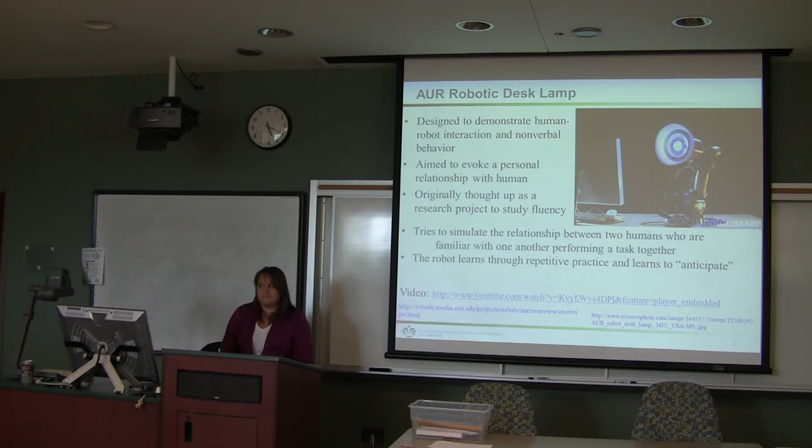My name is Josh Morgan, and I did the AUR robotic desk lamp. What this lamp was designed for was to demonstrate human-robot interaction with nonverbal behavior, such as movements with your hands, any kind of bodily movement to basically trigger the light to move where you want it to move.

And it's aimed to evoke a personal relationship with the human by taking repeated actions and basically remembering what those mean, and then when it sees it again, it's going to re-implement that same movement so that the human using the lamp is able to build a connection with the robot itself and feel like the robot understands the human and not just its motions.

And it was originally thought up as a research project to study fluency in your behavior and how the humans are able to interact with the robots.

And it tries to simulate the relationship between two humans as if they had worked together for a really long time and they've been doing the same skills for a long time, by just taking the memorization of the movements that are repeated each and every time this action occurs and being able to replicate them over and over based on the human's movements and how it commands the actual lamp to move.

So it was almost simultaneous. Whenever the human arrived, the lamp would arrive at that same color he was telling it to change to. This shows that the lamp basically understands the human's movements and is able to realize what the human wants it to do without any verbal command, based on previous verbal commands telling it what to do and linking a movement behavior with an actual behavior.

And that's basically it. So it's able to follow, and whenever he gets up and leaves, it knows to turn itself off.

I thought this was pretty cool because it's not just desk lamps, it could also work with, it was actually modeled after a 5-degree freedom robotic arm that was able to do the same thing. It simulated a human's movement and followed their hand and arm movements, and that's where they got the idea to use it in a desk lamp type of project.

Are there any questions? Can it differentiate between humans?

As far as the other testing, I'm not sure if it can, because in one of the videos, I think that was a concept video, but in one of the actual trial research videos, he had this device on his hand, and I believe that's how the lamp knew where to go in relationship to the person.

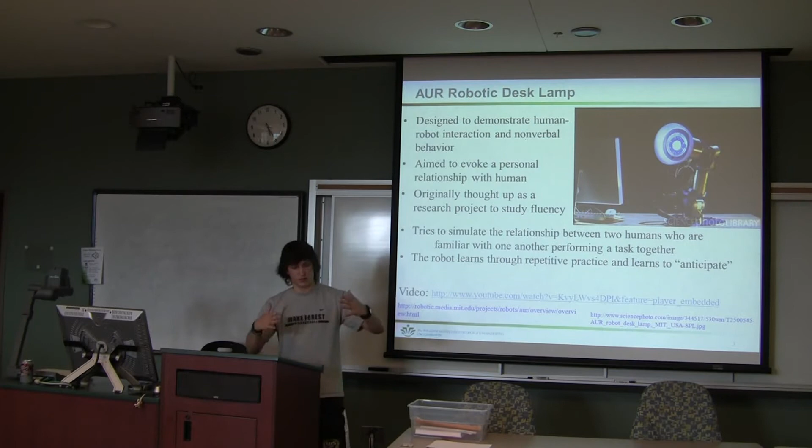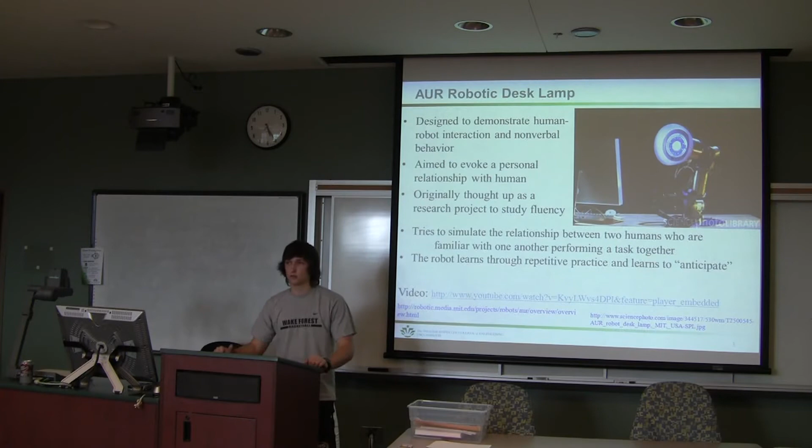It was actually set up like a triangle, so whenever he would walk from station 1 to station 3, skipping station 2, the lamp would go around starting at blue, switch to red as soon as it hit station 2, and by the time it got to station 3, it would have already switched back to green. So it's pretty cool, but I don't think it can differentiate between humans.

Are there any other questions?

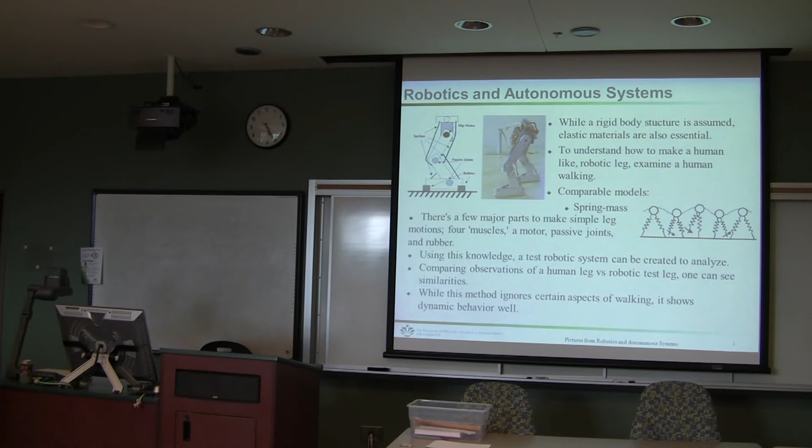Hello, I'm Alex Monster. I'm going to talk to you about the robotic autonomous system that is the robotic leg and how it works, basically.

Now, while the human leg is a rather rigid structure, there are some elastic materials required for the movements of the body, such as leg movements. You have to lift the leg up first, and it has two muscles that allow you to move up and down and swing it, basically.

There are some models it's been compared to, such as the spring mass model, which can be seen on the right side. There are four major parts to a simple leg: the motor, some four muscles which can often be used as simply springs, some passive joints, and some rubber to help it hold still when it stops, rather than just sliding around on the ground.

Now, this knowledge can be taken to make a test robot system, such as the one in the top left here, that can analyze and compare to a human's movement that can be analyzed. Then, using those two observations, you can compare how a human leg moves as compared to a robotic leg built to work like it.

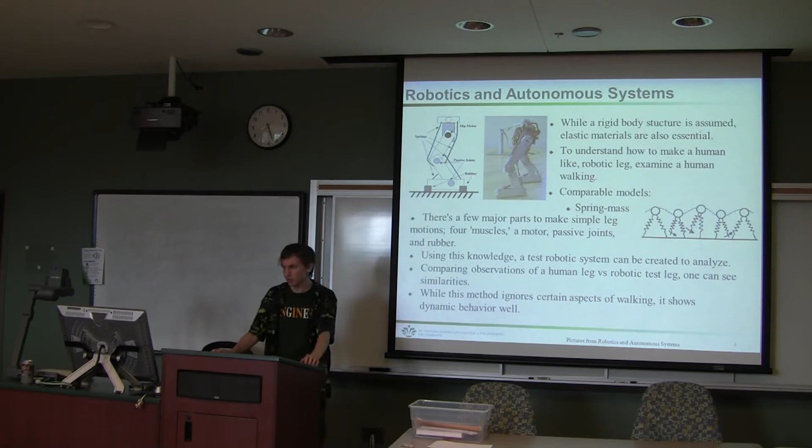While the method ignores some aspects of walking, such as turning while taking a step or such, you can basically get an idea of the dynamic behavior of the movements. That's all. Any questions?

My name is Barry Myers. I'm going to discuss the advancements in telesurgery.

Telesurgery is a technique that allows surgeons to operate on a patient while being at a considerable distance away from the operating table. The first successful operation was done in France on a lady in 2001. The surgeon was based in New York City, thousands of miles away, operating on a very small area. Pretty amazing stuff.

So how does it work? Multiple robotic arms with very accurate and precise sensors are used to interact with the patient. Many cameras at different angles are used just to give the surgeon a good view of what he's doing in there. We'll discuss this a bit later.

All the information is sent through the internet to the surgeon, who views it on a monitor and has a joystick that can maneuver the cameras around the area he's working in. The robotic arms have great precision and can be moved within very slight distances. Today, the most commonly used robots for telesurgery are the Zeus and Da Vinci.

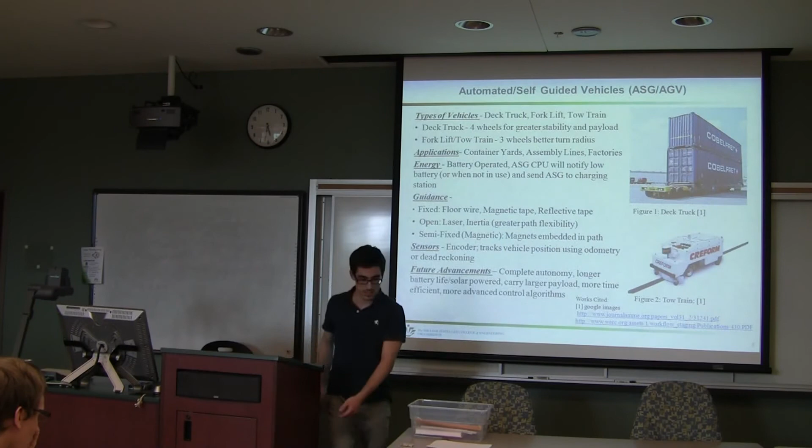I'm going to be presenting automated self-guided vehicles. You may have seen these before or seen the television program including them.

There are 3 types of automated self-guided vehicles: the deck truck, the common forklift, and what's called a tow train. The deck truck carries heavy payloads. It's designed with 4 wheels or greater, which improves its stability and the amount of payload it can carry.

The forklift and the tow train generally have 3 wheels or more. The forklift, with a single wheel on the back for 3 wheels, allows the forklift to have a better turn radius. Some applications are container yards, assembly lines, and factories.

The energy is battery operated. The CPU will notify when the battery is low and when the automated self-guided vehicle needs to go charge.

It'll follow a path back that's already coded into the program it's being sent to. It's pre-programmed to follow a path in, like, the container yard or a factory.

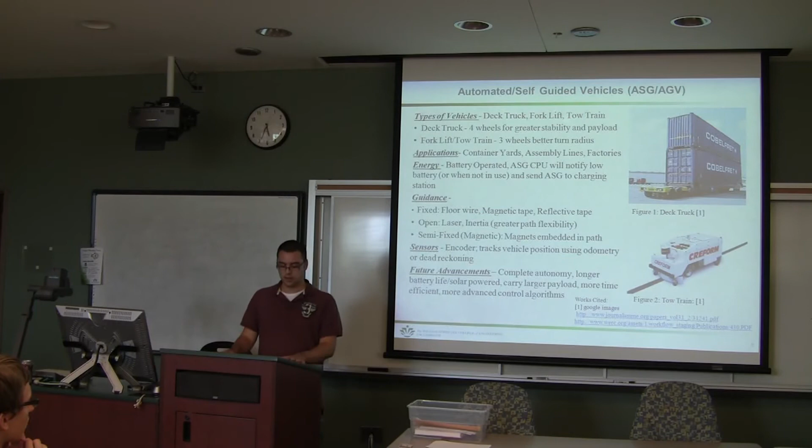Some sensors. The only one I could really find was the encoder. The encoder tracks the vehicle position and velocity using odometry or dead reckoning.

Some future advancements currently under study include complete autonomy, longer battery life, such as a better battery or solar powered. The deck truck can carry a larger payload, with more efficiency and more advanced control algorithms.

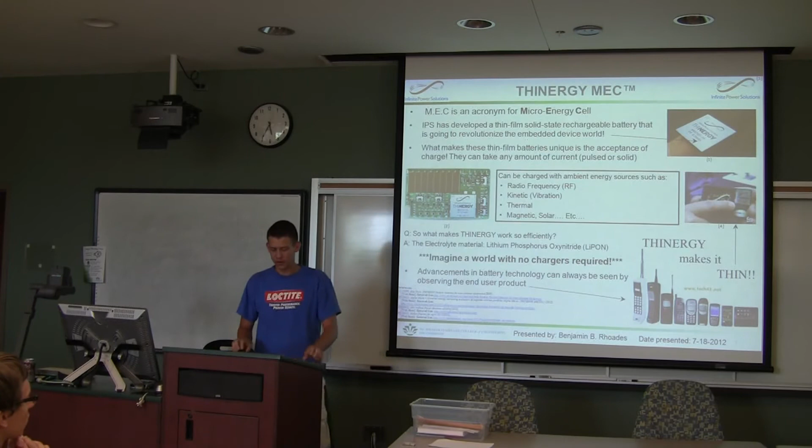Good afternoon, my name is Benjamin Rhoades. I'm going to be presenting on the Thinergy MECs.

This is actually a pretty exciting new technology that's come out. It first came out in 2007 for research, but really hasn't been proven until this past year. Of course, with any new technology, you have to have a period of proving yourself, so the Thinergy company has actually done this. It's made by Infinite Power Solutions. MEC is actually an acronym, it's Micro Energy Cell. They've coined this phrase, hence the trademark in the presentation.

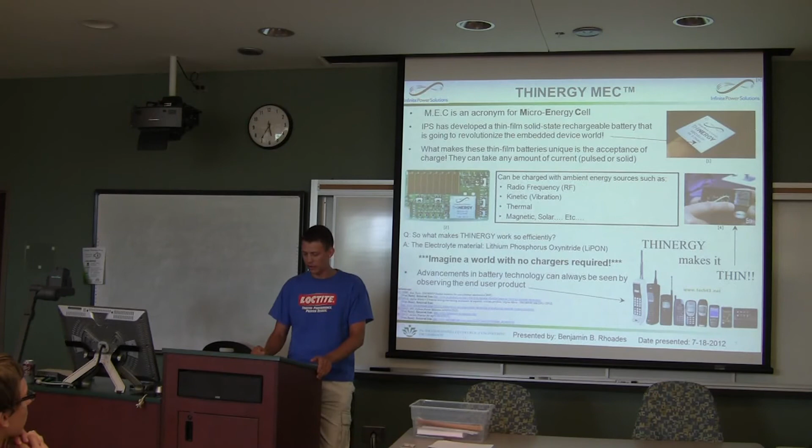So why do we need this for embedded systems? Think about this: most of the things that limit us are the batteries we have right now. We've used dry cell batteries for years and years, and most things are designed around dry cell batteries. We've had lithium-ion batteries in the past couple of years, but no long-term solution to the problem. This is a problem that Thinergy has addressed with their new MECs.

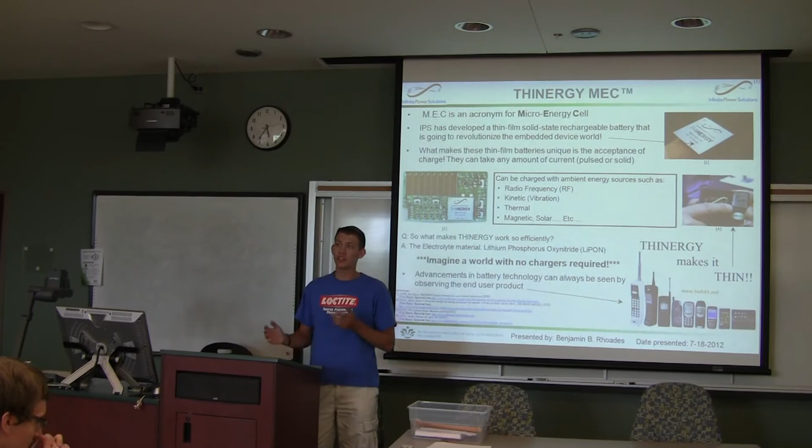This is a thin-film, solid-state rechargeable battery. What makes this different than most other rechargeable batteries is the type of charge it can accept. It can be done with constant current, like how most batteries are charged, such as lithium-ion. But the Thinergy can be charged with any kind of current it takes, from microamp to nanoamp. It can be pulsed, it can be solid. This is very important for energy harvesting.

So as you see here on the picture to your left is the alpha micro evaluation board. This has solar cells on it to be able to harvest this energy.

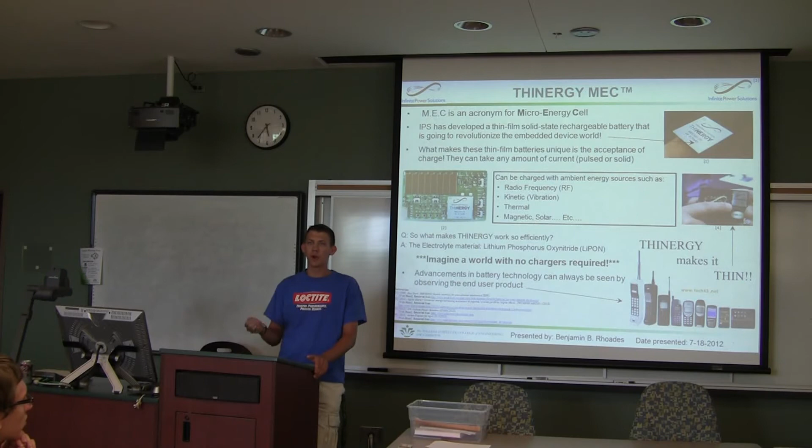So what does this mean for embedded systems in robotics, for example, for this class? You can actually embed this in your system for the life of the system. So if you have a robot that needs to operate autonomously and just report back information, or a data logging sensor in a bridge, for example, you can embed this in the concrete and never have to charge the battery again, because just the sheer vibration from cars going on the bridge will recharge the thin cell battery.

So what does this mean for future technology? As we can see from our picture, just in the past 30 years, as Dr. Conrad can attest to, as technology grows, things get smaller and get better. Hopefully none of you have the first cell phone ever invented, hopefully we're a bit more towards the right end of the spectrum. But that's one of the major things limiting us in our technology right now. The other components need to be invented as well, but battery technology is where the limiting factor is right now.

So I think this Thinergy micro energy cell is really the answer to some of our embedded problems for the future. It would be great to have a world with no chargers. That would be awesome, I know it would be for me. I hate charging my phone every day.

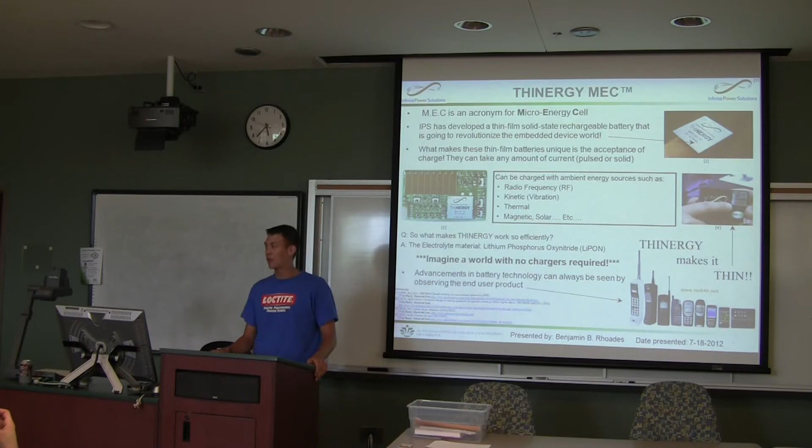Is there any questions? How does it charge based on the vibrations of a car driving across the bridge? It uses vibration from the actual car. What it does is take a kind of piezoelectric approach, that same kind of thought. What makes it unique is this LiPON material they use for the electrolyte, that's what enables it to accept the charge. That LiPON has only been out, from what I can see, for about 3 or 4 years.

So it's actually new technology. They have to have an energy harvesting device for that, which is kind of built in-house, so there's not much information about it. But they do have magnetic solar energy, so it's pretty awesome.

A lot of vibration harvesting is also due to a magnet and electrical field that is generated when the magnet moves. You can imagine it's not very much.

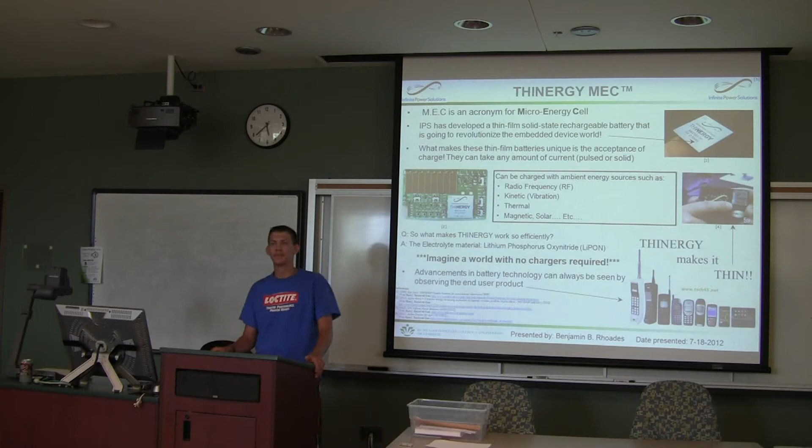Salazar, and I'm going to talk about neurosurgery for the future. Right now the robotic systems we have are used to assist surgeons and extend or enhance their abilities or skills.

For instance, the surgeon's average hand movement, like the tremble, is about 40 micrometers. By using robotic systems, they can drop that down to like 4 micrometers, so it doesn't shake that much.

Right now we have 3 systems that are being used currently. One is the supervisory control robotic system, which is when the surgeon programs the robot using some kind of virtual environment, and then the robot operates while the surgeon just supervises the movement.

If anything goes wrong or he needs to adjust something, he can stop the surgery and make adjustments. The other one is telesurgical, which uses joysticks and a monitor or some kind of scopes, and you can operate in real time in different places. The other one is a shared control robotic system, where the surgeon uses some kind of robotic hands, operating in real time but doing the operation with the assistance of the robot.

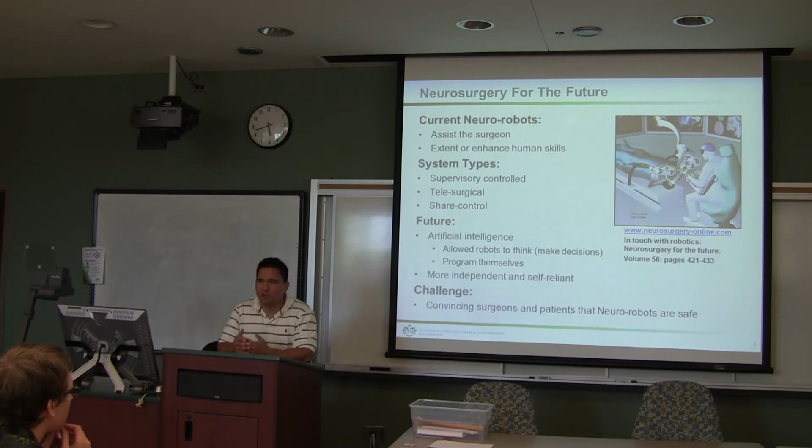If the tolerance is very, very small, how can the doctor stop the procedure in case something goes wrong? Well, I would assume it's just pressing some kind of control, he has control over a computer or something. The clock is very quick, so maybe you can't stop it in time. Right now it's like dual core, quad core, they're pretty fast, so yeah, I think... it would be able to stop it.

Any other questions? All right.

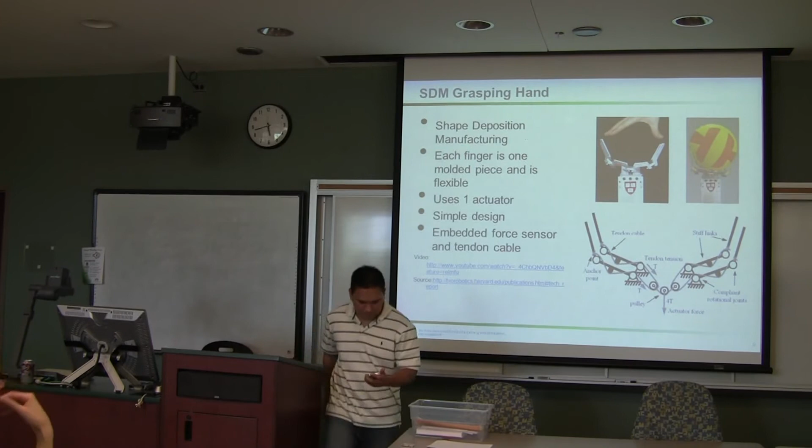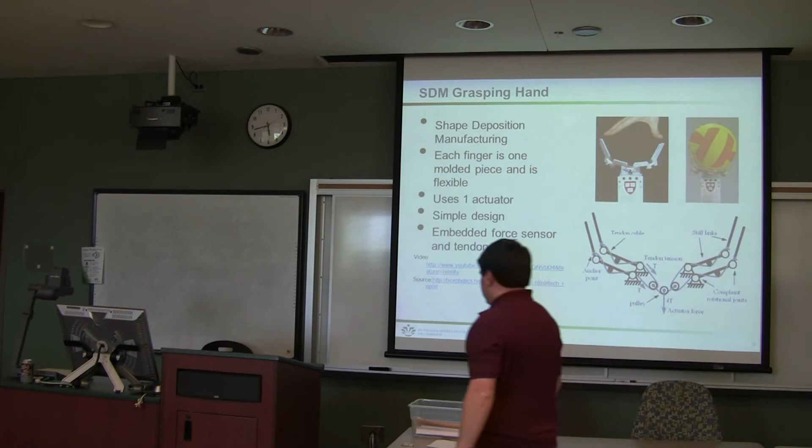This is the shape deposition manufacturing grasping hand. Shape deposition manufacturing is similar to 3D printing, where a layer of material is put down. Any components such as sensors or cableways that you would want to put inside of the gripper, you install those, then another layer of material goes down, and you have your finger.

With this type of manufacturing, each finger is a single piece and weighs considerably less than if it was machined from, say, aluminum or plastic or other types of materials. It also requires fewer parts.

This particular gripper uses only one actuator, which you can see at the bottom right here, and each finger has a stainless steel cable that runs past the first joint and up to the second joint. When tension is pulled, it causes the finger to close.

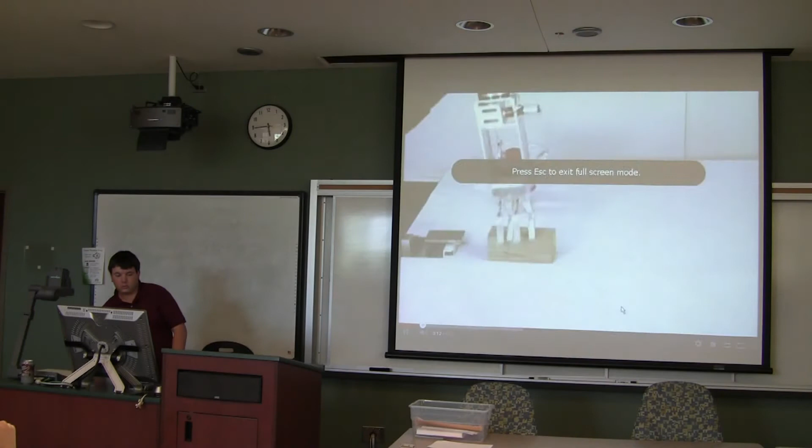With this design, position doesn't have to be very accurate. You just have to get close enough to the object, and the gripper is designed to expand open or go around the object. Whereas with other styles of grippers, the gripper is usually designed to conform around the object itself, so if you had different shapes, you would have to change grippers.

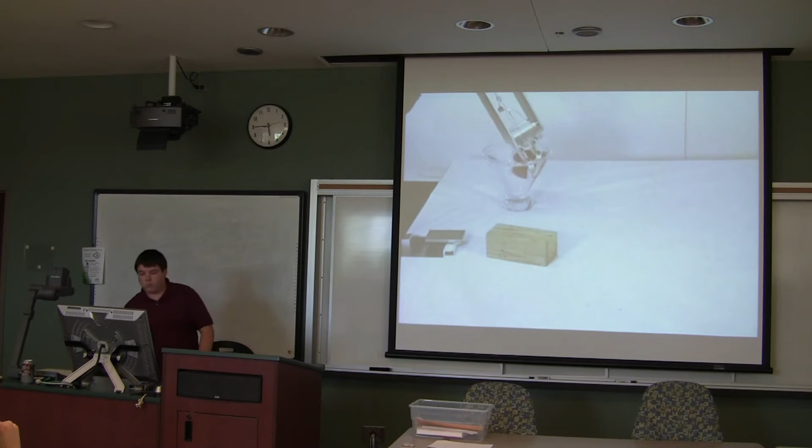Kind of like the claw that you play in. Yeah.

With this type of manufacturing, since you're not getting precisely over the object, the grippers are designed to flex possibly 2 inches in either direction.

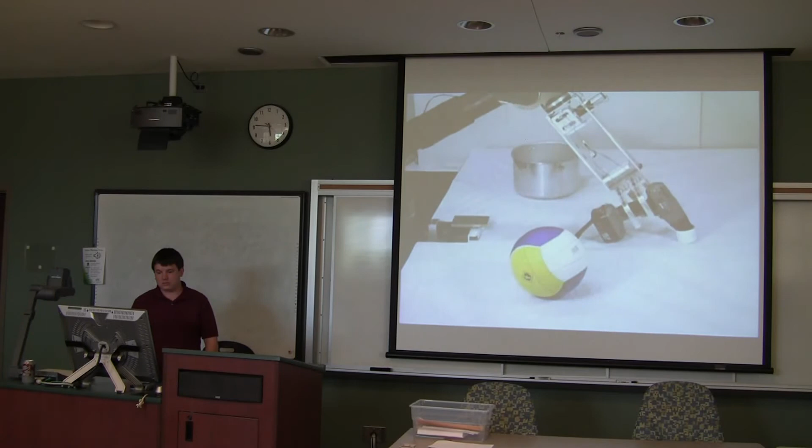Is there any questions? If there were multiple CDs right there, would it be able to grab just one? Even I had trouble doing that. It might not be able to grab more than one. To answer your question, no, it's not like the game, because in the game it doesn't actually grab anything.

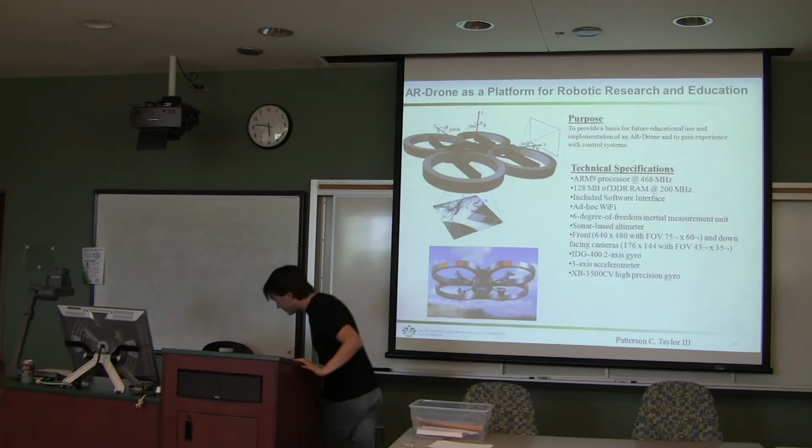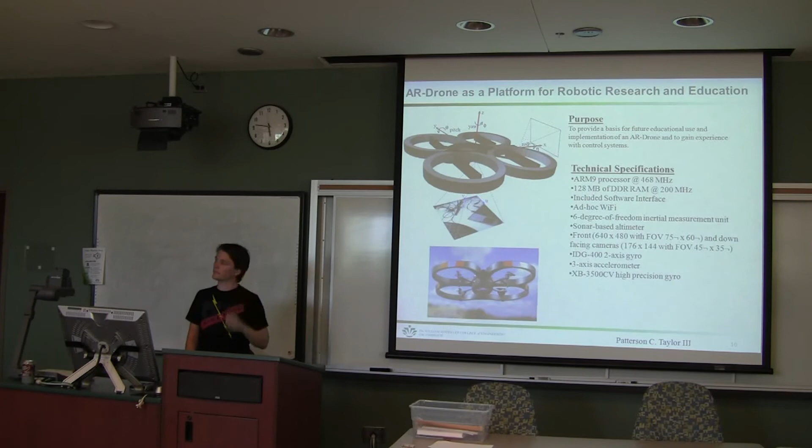Okay, so I'm Trip Taylor, and I'm doing an AR drone, or quadricopter, as a platform for robotic research and education. The purpose for this robot, and the reason the guys worked on it, was to provide a basis for future educational use, similar to what we do with the Danny Block, so that it can be used for educational purposes.

It operates with an onboard processor and 128 megabytes of RAM, and it has built-in Wi-Fi, so you can connect it to just about any computer or wireless device. It has a lot of different measurement units to figure out the roll, yaw, and pitch, all shown here.

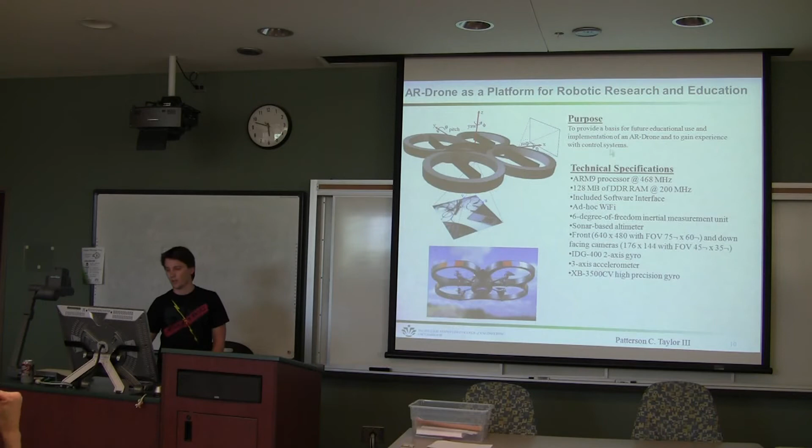It's got a front-facing camera that's higher quality than its downward-facing camera, which actually hurts it, because onboard it has to compress that file and send it, so you get a slightly delayed picture. But these guys figured out a little hack that isn't in the paper, a bit complex, to cut down the amount of data transferred so it would be faster.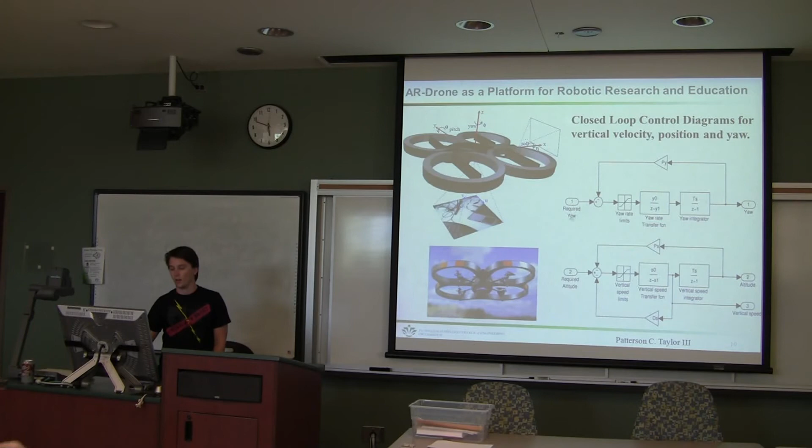You can see right here they have a moving bot, and they do it again later in this picture. The downward-facing camera uses their own image processing, which they did not share in the paper, to determine where the target was below it.

They could actually drive this little car around, and as long as they kept the altitude of the quadricopter above 0.4 meters, it would work, because below that the lower-facing camera would see a smaller image and wouldn't work as well. So as long as they kept it above 0.4 meters, they could drive the car around and it would manage to stay hovering above the vehicle.

This all goes towards learning the same things we're learning in this class, only more complicated. The future generations after their robotics are going to be something we probably couldn't even come up with today, and they'll be using platforms like this and the Danny-Bot to learn it.

And here's my credits for the guys who wrote the paper. Any questions? You cheated, that's more than one slide. Right, yeah, well the course was changed. Minus 10. It's actually a slide - it took me forever to figure out how to do that.

What was the open loop? How did they do the open loop? What did they do with the open loop control sequencing?

The open loop controls the pitch, roll, yaw rate, pitch and roll, and the vertical speed. That's why I threw this image up there so you guys can see which each piece was.

This bot already exists - you can go out and buy it, but these guys provide some directions for people who would like to use it in an educational setting without spending the initial 2 years that this team worked on it to work out the best way to operate it.

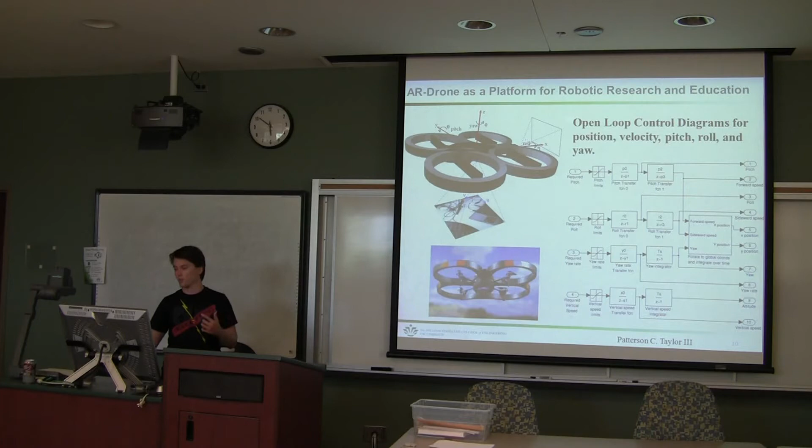The bot itself has a built-in system to work with the pitch, roll, and yaw, and keep the motor speed and angles at a set rate. That's why they were able to do these two closed loop setups to control it, and then they left onboard processing for maintaining those speeds.

How many cameras did you say that thing had? Two, a front-facing one and a downward-facing camera. This picture is taken with the camera underneath it. I believe that's nothing more than the Parrot quad rotor, which is out of the box controllable with an iPad or an iPhone.

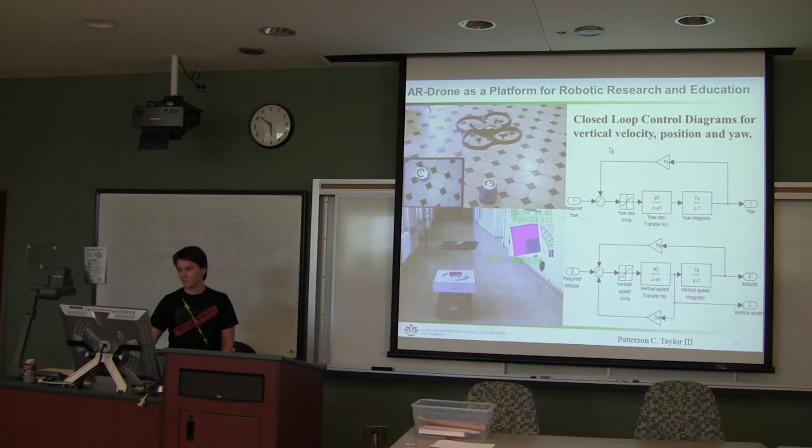Yeah, these guys have been working on it to make it autonomous. I mean it's cool, but it's also scary to think about these flying around above us, police quadrocopters monitoring you. Any other questions?

Alright, I did my presentation on robotic mining in space. As with a lot of things, the next frontier is usually going into space. Robotic mining units already exist, mining in South Africa and other places, but what they're trying to aim for is asteroid mining or moon mining. The actual mining robots aren't completely fitted for this type of venture yet.

So there are a few factors they need to cover. One is localization without GPS, because GPS doesn't work underground, and there are no satellites around the moon that can provide GPS coverage.

Another thing is that it needs to be small in size and weight. It needs to be able to go down inside an asteroid or the moon and fit into all sorts of little nooks and crannies to get the goodies. For transport, you don't want to send things into orbit that weigh a lot, because it wastes a lot of fuel.

Another big concern is the autonomous aspect of it. The robots are most likely going to be used in conjunction with one another, meaning they're going to be in a swarm, so they need to communicate with each other to be more efficient. You also can't control these robots from Earth because there's such a long delay from Earth to the moon or even a more distant asteroid, and since there are no people on the moon to control them yet, that's out of the question.

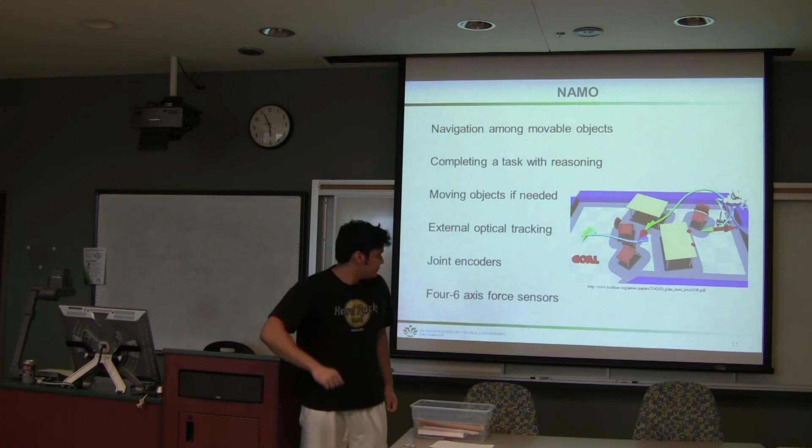I'm John, and I'm going to talk about NAMO, which stands for Navigation Among Movable Objects. Pretty much, it's just completing a task with reasoning, walking through a room without running into stuff, without stopping and turning around. It's actually getting through the room while being able not to be trapped in by movable objects.

It is trapped in a corner, as you can see from the screen. It maps out the room using optical tracking and force sensors, and then plans its route on how to actually get out of the room.

And it can also tell whether or not the objects are movable, or if they're bolted, or if they're stuck, or stuff like that. So it's got a lot of algorithms in it to be able to tell.

And then also it's got joint encoders, which helps the robot to be able to track through the room.

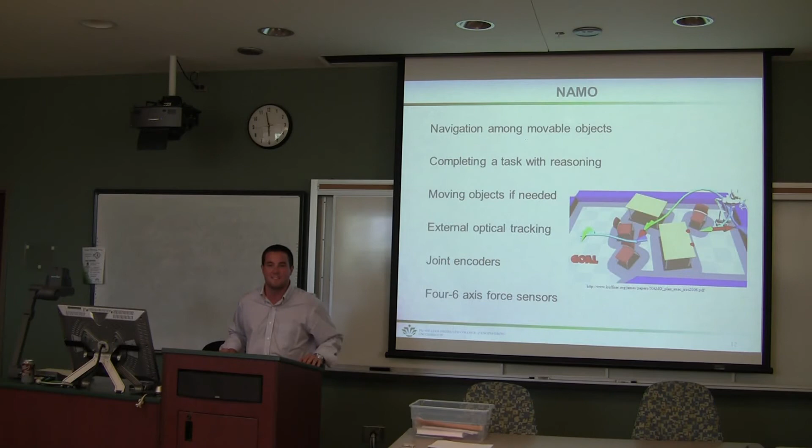But it should be really cool. I think it'll be cool whenever they get through with it.

Is it like human shaped? Yeah, it's like human, and it can get through a room just like you or I can.

How does it stick to the wall? This one doesn't stick to the wall. The future for this is running, like parkour. You've seen it before.

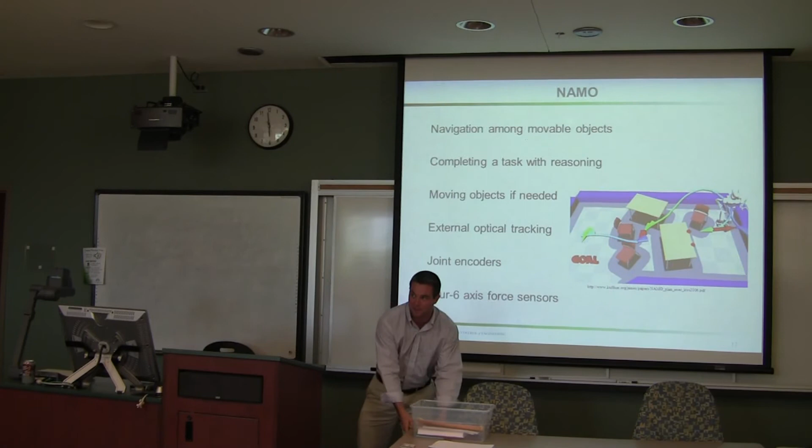So if it moves something, does it move back once it gets around it, or does it just move and keep going? It'll go up to a table and actually move it. It won't just throw it over or chuck the table across the room.

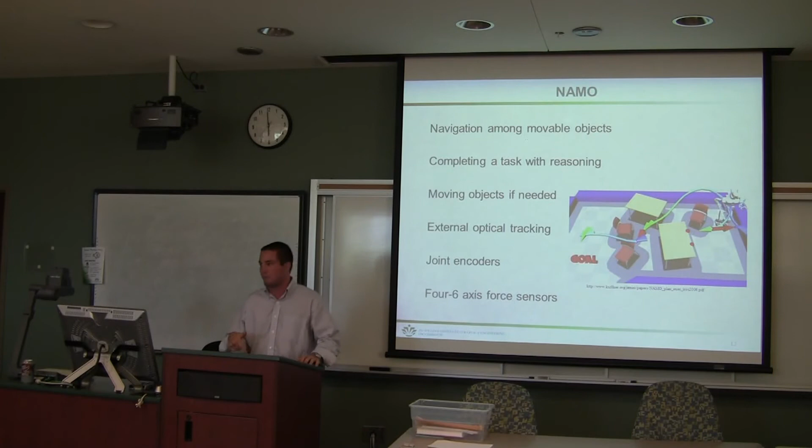No, it actually moves it. And whether or not it's told to move it back is whatever they decide. It can put the room exactly back how it was after it gets through, or they can leave it as it is after it walks through. But it doesn't throw stuff around while it walks through.

How does it determine where everything is in the room? With the sensors that it has, the ultrasonic sensors and all that stuff just maps the entire room. Any questions?

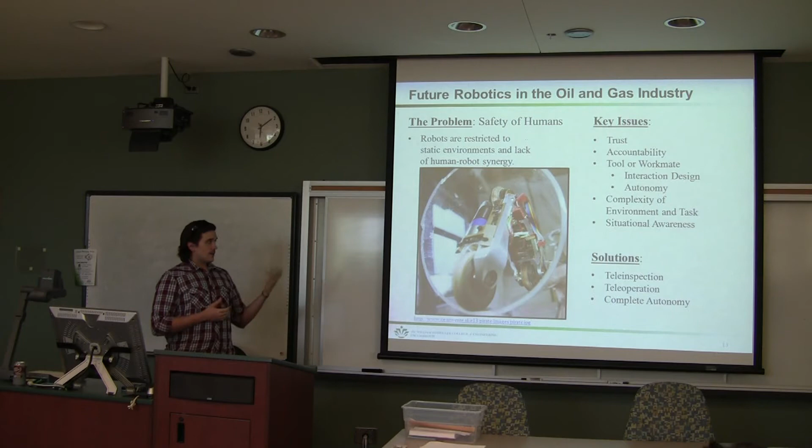So this robot doesn't look very human, it's obviously doing just a task. So the autonomy of it—is it completely autonomous or semi-autonomous, depending on whether it's a tool. If it's a workmate, then it's going to be completely autonomous and just doing its job, or it could be a tool, so it's semi-autonomous.

The complexity of the environment, the task, and the situational awareness—these main topics are the fact that in this oil and gas industry, things change, and you kind of get to know your environment, you get to know the factory, and you know what's normal and what's not normal.

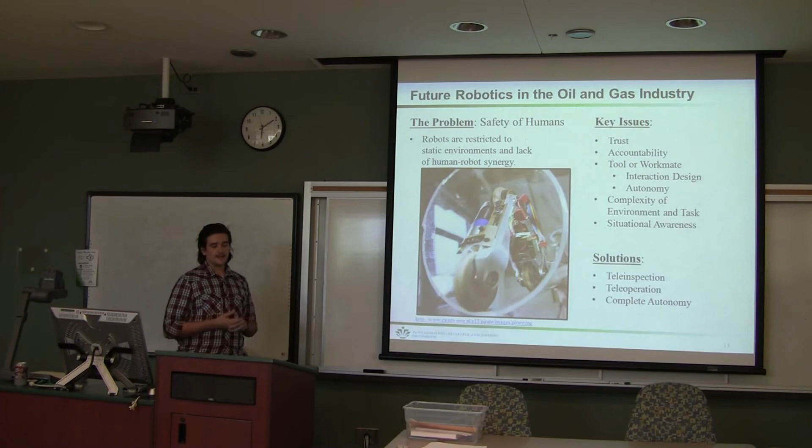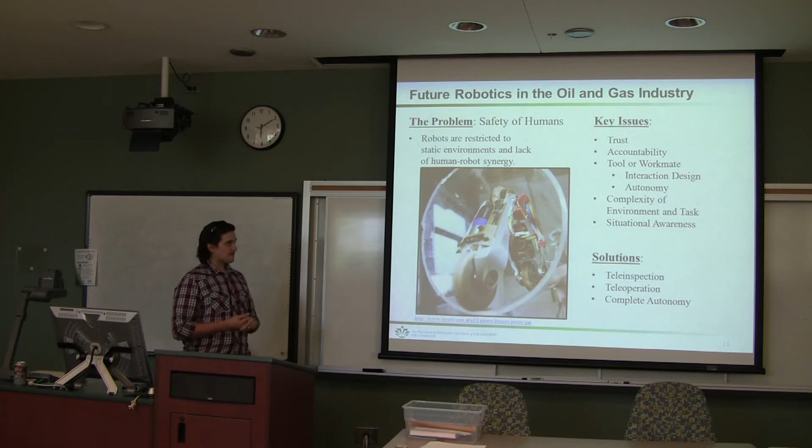The solution for this is the actual future of robotics: tele-inspection or tele-operations. This is a meshing of the autonomy of the robot, so it can do its job while an operator makes sure the other parts of the environment are covered, or have complete autonomy, creating robots that can inspect everything and have that same situational awareness to notice that something is not normal, not the same as it has been the last 100 times doing this sweep through the pipe.

So this is just an example of a robot that does pipe inspection, and that's the end of it. Any questions?

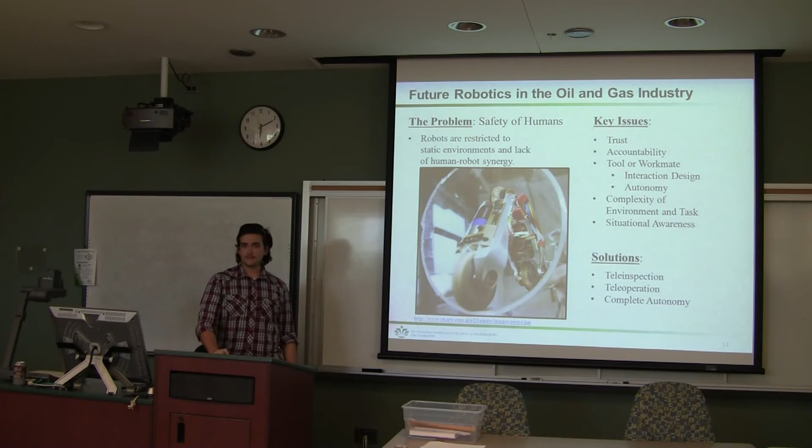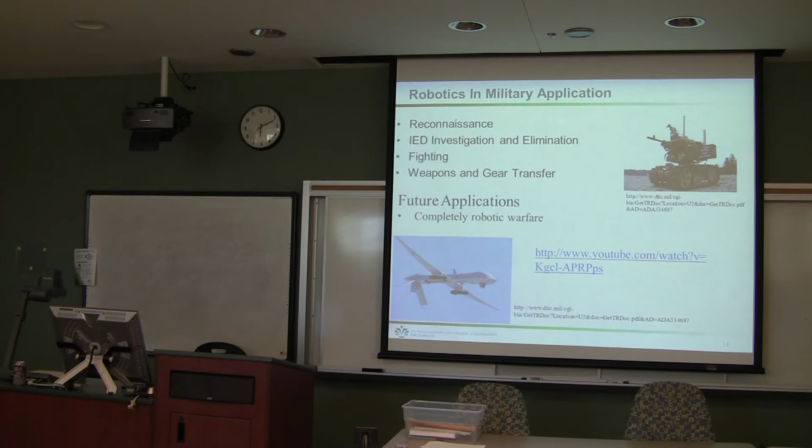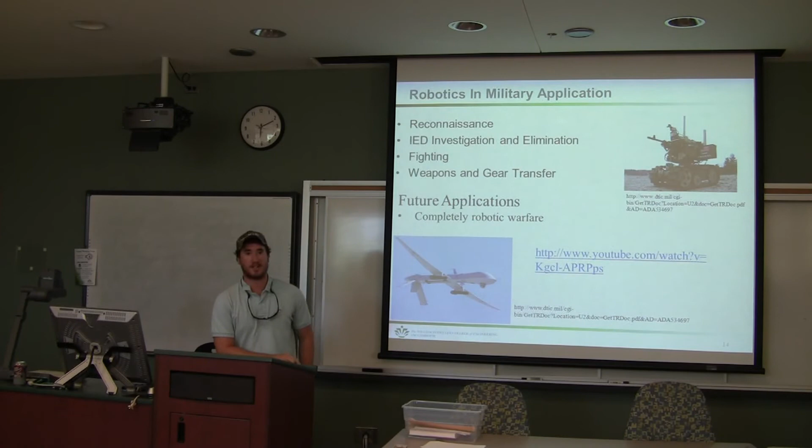I chose to do an extremely broad topic, which is robotics in military applications. From the previous presentations today, you can see how many different things can be used in the military application. The NAMO stuff, for example, being able to traverse obstacles and get through buildings, can be very helpful if we're going to try to create a fully autonomous robot that would replace humans in warfare, which I think is eventually where we're headed. That would be pretty cool because we wouldn't have to send human lives overseas to risk their lives to fight for our freedom.

Some of the things the military is using right now in robotics is reconnaissance. Anybody that's played Call of Duty or other games will know that this is a UAV, an unmanned aircraft that can fly over a section of area and map out different things, where people are, and so on. Last week we had another presentation where the guy was talking about the Talon, a weapon-based platform on tracks that can drive around and do different security tasks.

Another big thing they're using robotics for right now is IED investigation and elimination, which saves a lot of U.S. and various other human lives, which is always a good thing.

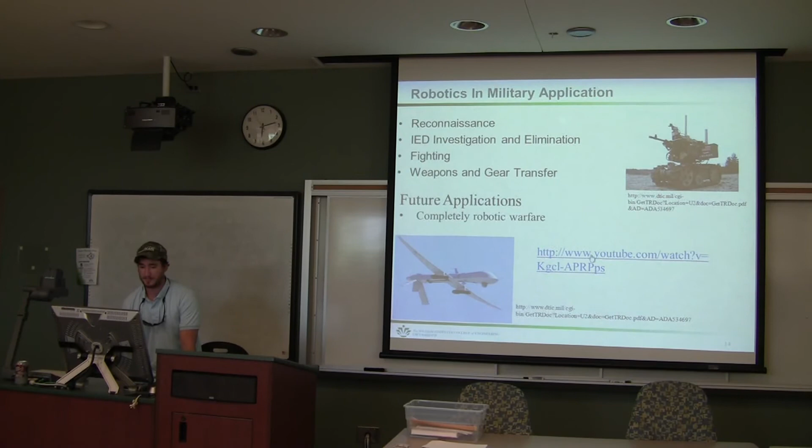So I have a video of a DARPA project that... but this is what DARPA's funding right now, one of the projects that will eventually look like a human, if I can get back to it.

You have to exit. I had it set up on mine where you have to click Control and then click on the link. Maybe if I can get it... copy and paste. There you go, here.

So this is just talking about the project. Here's what it looks like right now, sort of concept stuff. They have to kind of arm these things. They can walk up steps. Hey, it's a chicken walker from Star Wars.

It is more human-like again, and then a guy comes in and pushes it. This guy pushes it and it balances itself out again. Here it kind of just looks around and scans the area for different objects. You can see two legs and two arms, so very human-like, basically doing push-ups. Hopefully this will be the future of military robotics, and we won't have to use any more human lives to do our bidding.

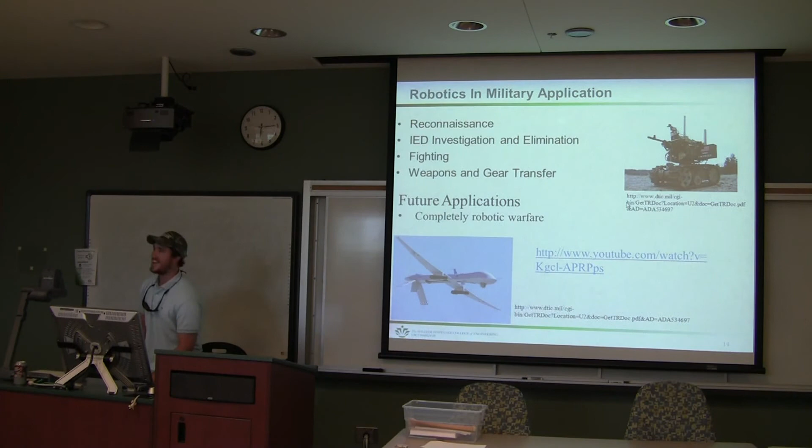It's like the Terminator. Does it get stronger when it does more push-ups? I don't think so. Maybe. Any other questions?

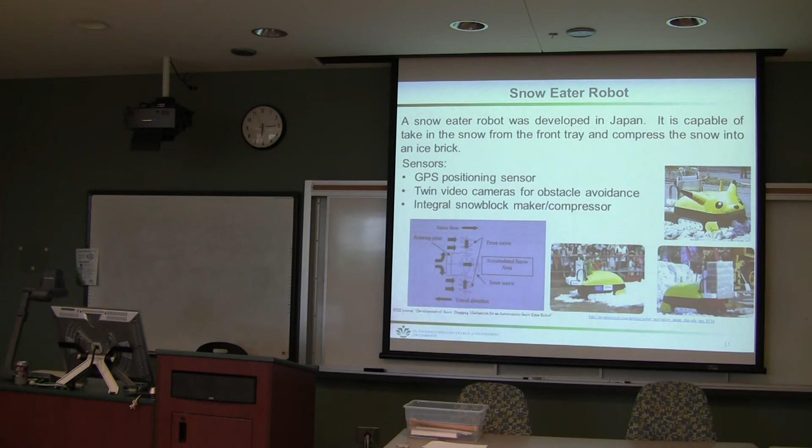You guys ready? Alright, so I'm going to talk about this snow eater robot. This snow eater robot was developed in Japan, and the initial design was aiming to clean up the snow on the road. But in Japan, the road between houses is tighter, more claustrophobic, so those heavy duty snow plowing machines don't go through. So this institute in Japan designed this robot right here to clean up the snow and everything.

This robot kind of reminds me—I don't know if you guys watched the Disney movie WALL-E—they actually compressed the snow into ice cubes and stacked them up in the back like that.

For this robot I couldn't find any video, only pictures. This robot is capable of taking the snow from the tray right here. Here's the snow dragging mechanism, and there are 3 screws right here, and snow goes in right here and it's moving this way.

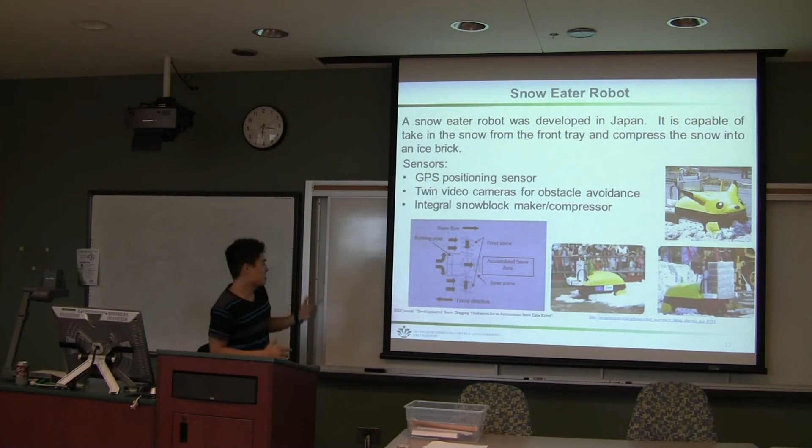To stack up. The sensors for this robot include a GPS positioning sensor and twin video cameras to avoid obstacles, detect snow, and an integral snow block maker and compressor.

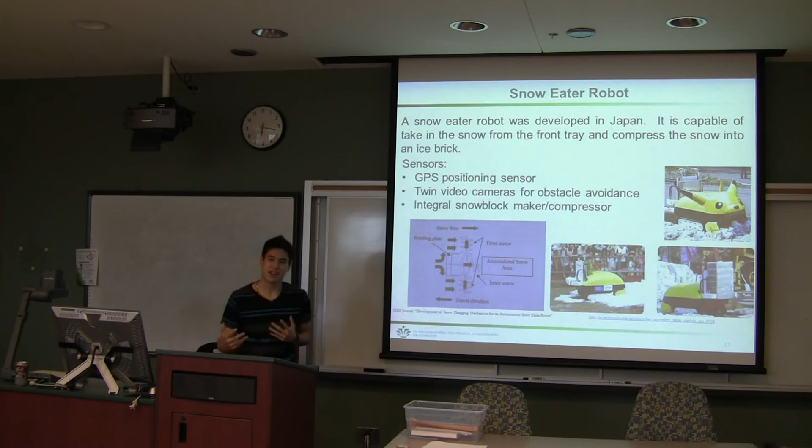This robot is aiming for $8,000 to $9,000, and will probably be available within the next 5 to 6 years, perhaps.

I just want to post this picture—it's been modified to a Pikachu. Really cool. Yeah, so that's it.

Is this available in Walmart yet? I don't think Walmart sells something like $8,000 to $9,000 though. Huh, okay. That's probably the question. Okay.

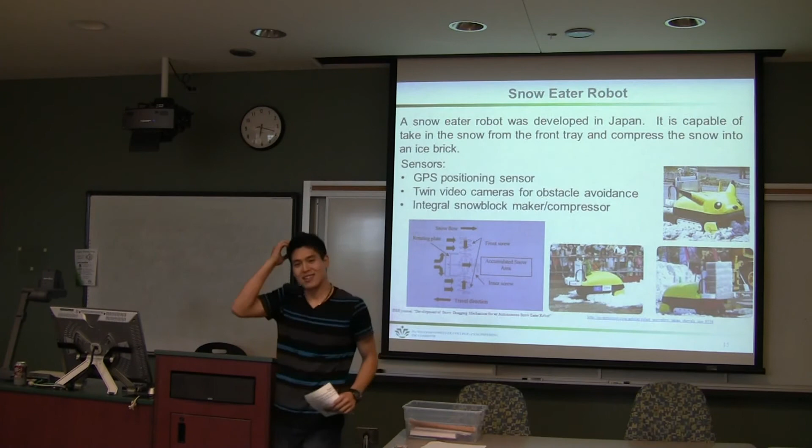Go ahead, how high does it stack up the cubes? You're talking about the block? Yeah, I don't have the detail. I couldn't find a detail for how high it could stack up to, but you're probably gonna build a skyscraper.

I didn't know they had snow in Japan. It's in North Japan that has a snow issue. I'm sure mountains have snow. In fact, they once had a Winter Olympics there, so I'm really sure they had snow. That was snow that was created, not snow that came down.

Okay, I'm Scott Collins, and I didn't necessarily choose one robot in particular, but chose a sector of robots which are supposed to really gain traction over the next 10 to 15 years. Supposedly there are 3 sectors.

There's what is an industrial service robot. The definition for that is an immobile, single-task robot with little interaction with humans—basically what's employed in all manufacturing.

There's also a professional service robot, which can be anything like industrial cleaning equipment, maintenance, data acquisition, rehabilitation robots, and things of that nature. Then there's the personal service robots, defined by Robotics Trends as robots or robotic technology purchased by individual buyers or consumers, which educate, entertain, or assist in the home.

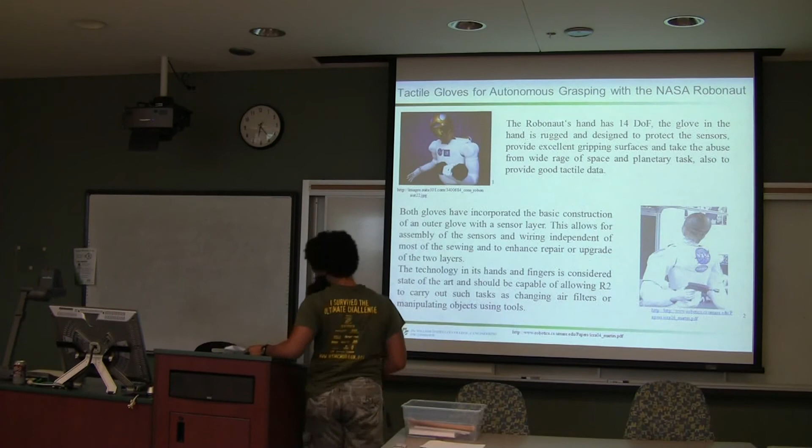I chose the tactile gloves for autonomous grasping with the NASA Robonaut. The glove in this robot is rugged and designed to protect the sensors, the tactile sensors and the pressure sensors, from the wide range of planetary and space tasks that it will be doing.

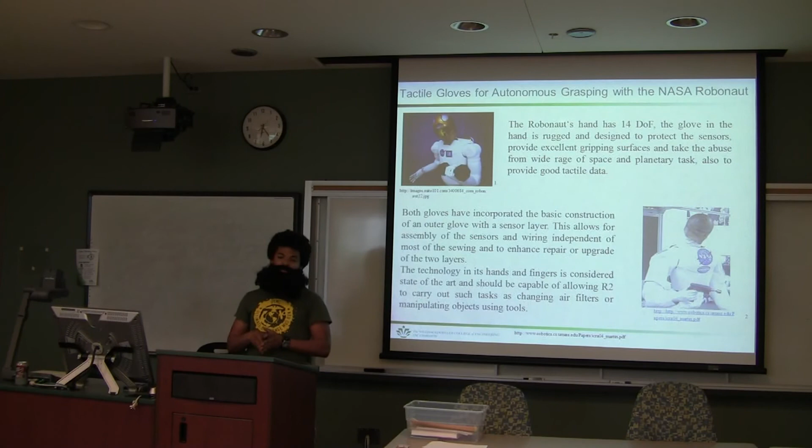Both gloves have incorporated an outer glove and a sensor layer. The outer glove is composed of two fabrics, meaning it's a hybrid of a fabric that doesn't let it slip, and also a lycra blend fabric.

The technology in its hands is considered state-of-the-art. It should be capable of allowing the robot to carry out tasks such as changing air filters, manipulating objects, and using tools.

The future of this technology has been contemplating sending the robot outside of the station, so it will provide help and assistance to the astronauts to help fix or make repairs.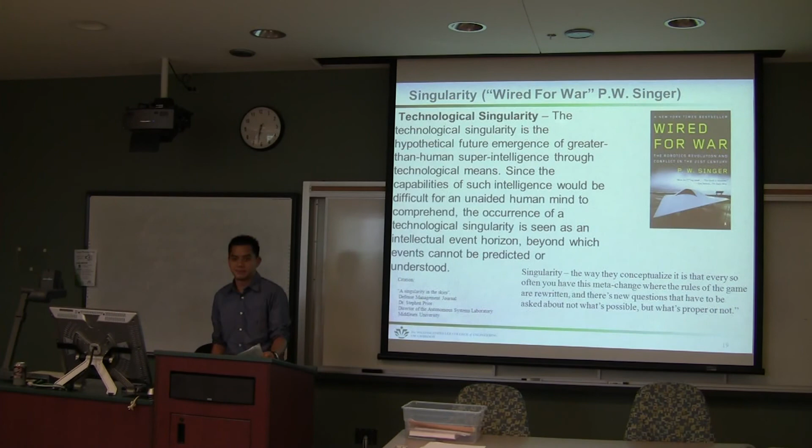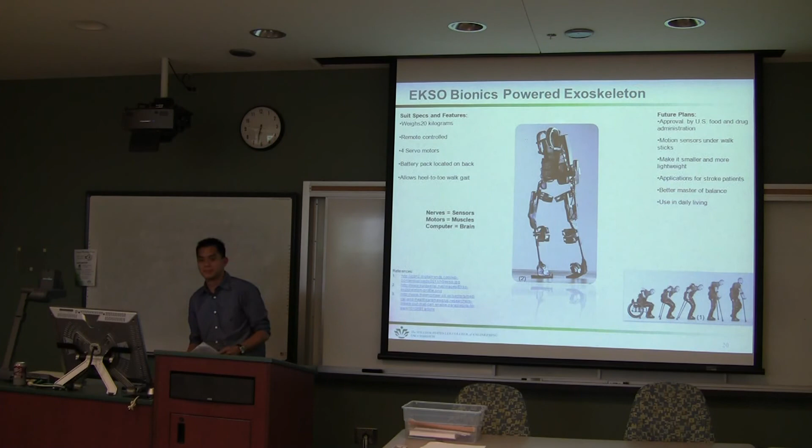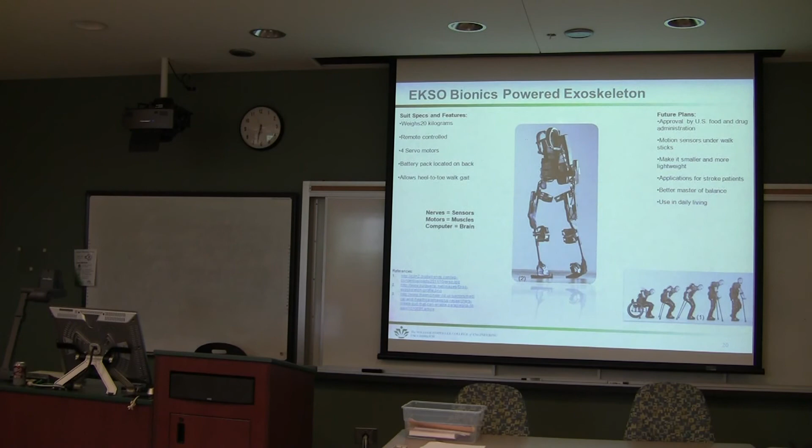Yeah, now this is where it's going to get tricky. Go to the next one. It may actually start talking when you go to that. Okay, no it's not, so go to the next one after that. What is this? All right, you're skipping because he's not here. I've got something else that plays it. Whose is this? That's mine. Go for it, it's your turn. Didn't have any sound on it when I was up there playing my video. Sounds muted right now. Oh, the volume. Yeah, the volume was on. What is this? Oh, human stuff.

All right, my name is Herbert Hill, and I'm going to do a presentation on the powered exoskeleton by Ekso. The company was originally named Berkeley Bionics, and then they changed the name. The purpose of this robotic technology is to help people that are paraplegic, which is being paralyzed from the waist down.

In this model, this is one of the early ones. It weighs only 20 kilograms. The reason why they made it so lightweight was they had already started this technology in the military, and when they thought about it for rehabilitation purposes, they felt like there wasn't a need for a lot of weight since the person is just carrying the weight without a payload.

Right now it's currently remote controlled by another user. The person wearing the suit is not able to move completely on their own. It does have a battery pack on the back, just like a regular backpack you would wear. And it has a regular heel-to-toe walking gait, like if you're doing the military march type thing.

The future plans for it is for it to be passed by the U.S. Food and Drug Administration. I think it already has, because they've already put it in use at some rehabilitation centers. They also want to put sensors under the walking sticks - basically crutches - so that the legs know what to do when the crutch moves. They want to make it smaller, more lightweight, and used for stroke patients as well.

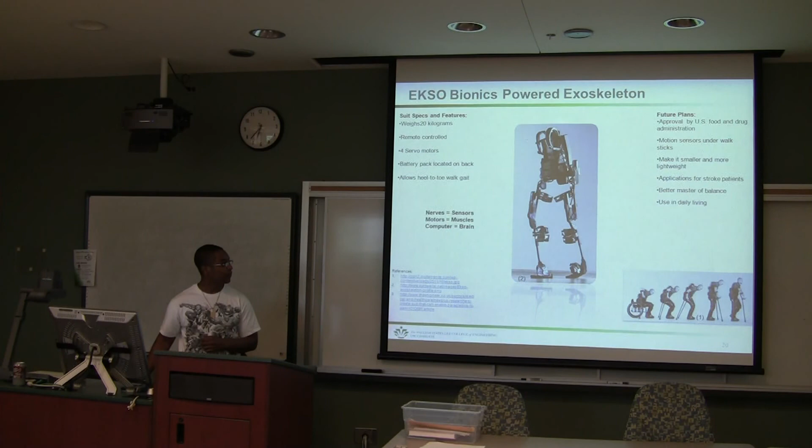So that people don't try to misuse it, and again, this is not for military use. This is for other types of patients.

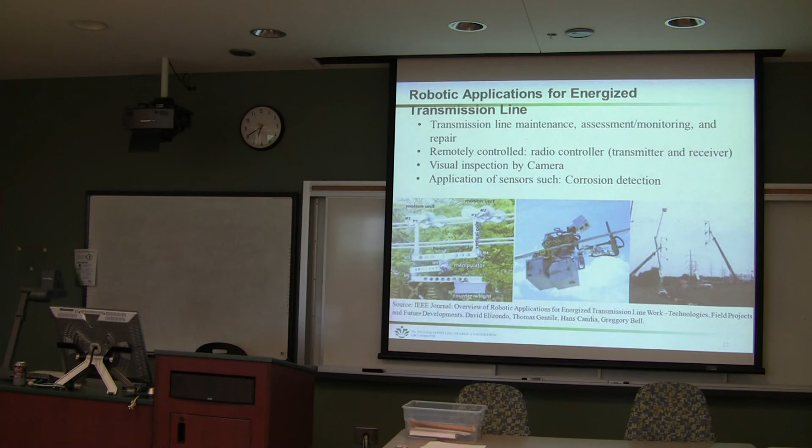Hi everyone, I'm doing the robots applications for transmission lines. The purpose for this was to reduce personnel working on transmission lines, reduce hazards for safety, and also to ensure the reliability of the transmission line.

This robotics technology for the industry was developed in 2006 by a company called Hydro-Quebec TE Research Institute. They had three major types of robotics: ground-based, suspension from the line, and aerial-based. In this presentation, I'll focus on suspension from the line, which has been the arms and eyes of the linemen to do maintenance on the transmission lines.

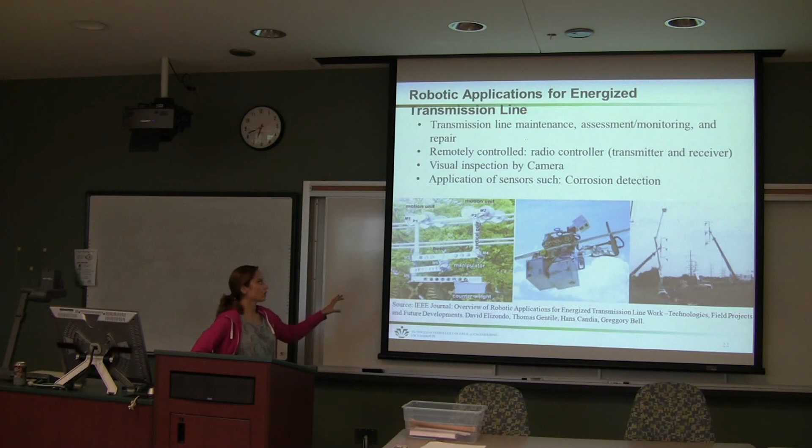The applications for this include visual inspections by cameras, where the camera does not touch the components, only zooming in and zooming out. Also sensing corrosion on the conduction lines, where it measures the change in the diameter of the conductor, and measuring electrical resistance in splices.

A third application is possibly installing clamps on the robot, where the robot could do repairs on the transmission line. Currently it's remotely controlled, but what they're trying to do is develop it to be autonomous.

Any questions? Are the transmission lines energized while it's traveling on them? Yes, that's how it gets its power. From the transmission line? I think it has batteries. I can't believe it gets its power because we're talking 22 kilovolts. Yeah, I think it has... if you suspend something, they just put out... those could be step down transformers. That'd be an awful big transformer. Drop it down. Drop it down to 12 volts. All right, next. Good.

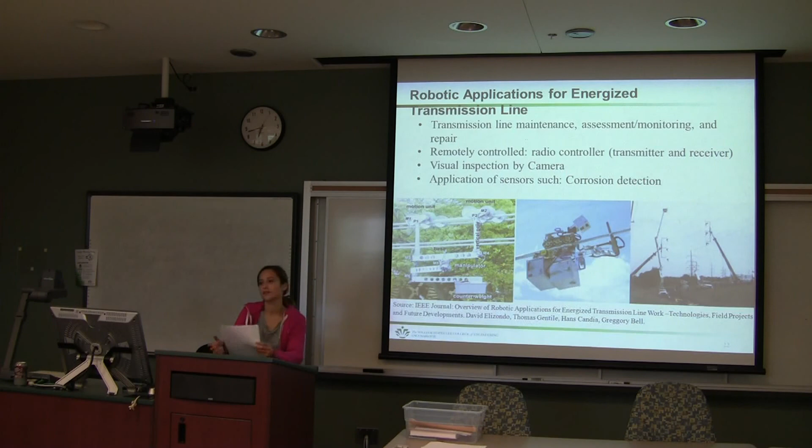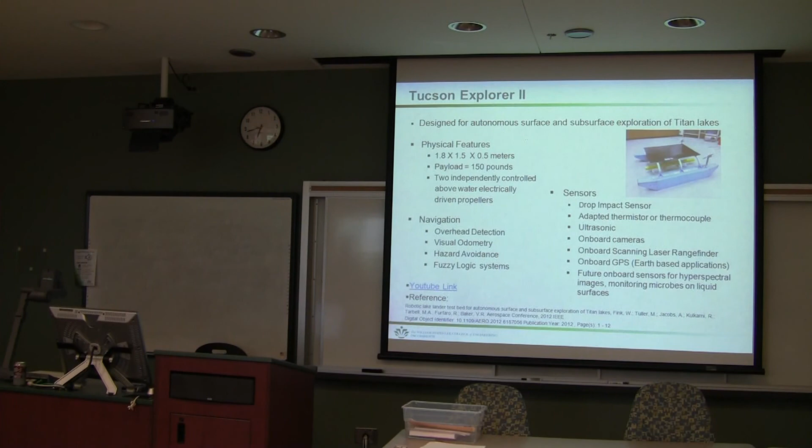Hi, my name is Raju. I will be speaking on the Tucson Explorer 2, also called TEX. This is designed for autonomous exploration on Titan.

To give a short background on Titan: it's the largest moon on Saturn, the only known satellite known to have a dense atmosphere, and the only body other than Earth where there is clear evidence of stable bodies of surface liquid. The lakes found there are hydrocarbon lakes.

The physical features of this robot: it can carry a payload of 150 pounds, which is where you would keep the computer, the batteries, and the sensors. It has two independently controlled air propellers at the end of the robot, allowing it to travel forward, backward, spin, and turn sideways.

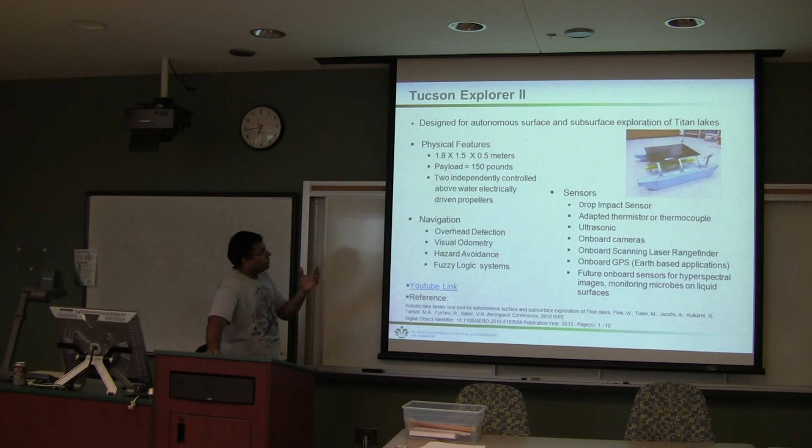There are a number of sensors being used here to measure the surface temperature, wind direction, wind speed, and intensity and duration of hydrocarbon precipitation. Three sensors at the top: the drop impact, the adapted thermistor, and the ultrasonic. These have been modeled together to form this device, which is just a proof of concept.

It also has cameras for navigation and an onboard GPS specifically used for Earth-based applications, since this is not yet ready to be deployed on Titan for the next 5-6 years. Until then, it can be used to survey Earth's water bodies.

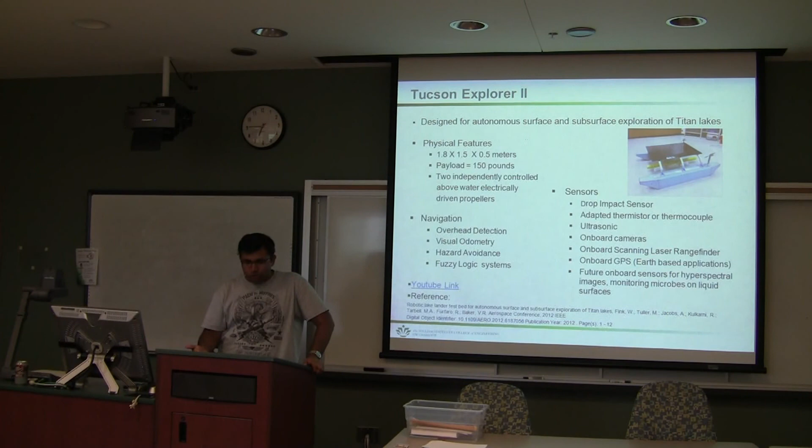Right now this is controlled with a remote, but they'll be working on making it autonomous. For navigation, it makes use of a blimp or balloon overhead, which takes an image, converts it into grayscale, and determines the actual location of the robot to help it traverse the terrain. There's a YouTube link we can have a look at.

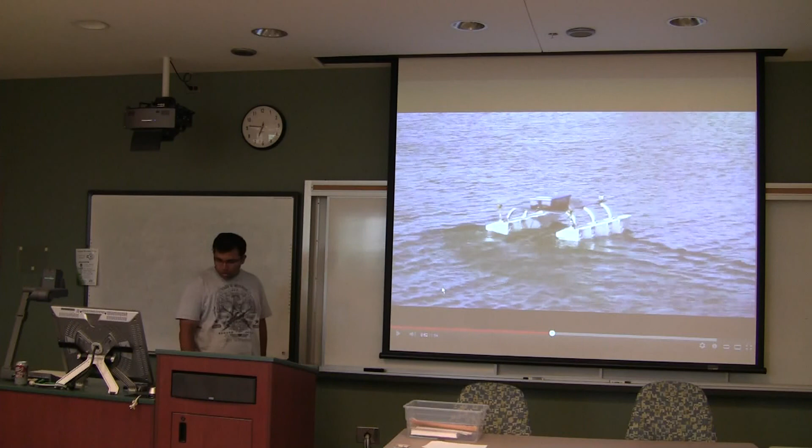So as of now, it's just remote controlled, but they're working on making it autonomous. Any questions?